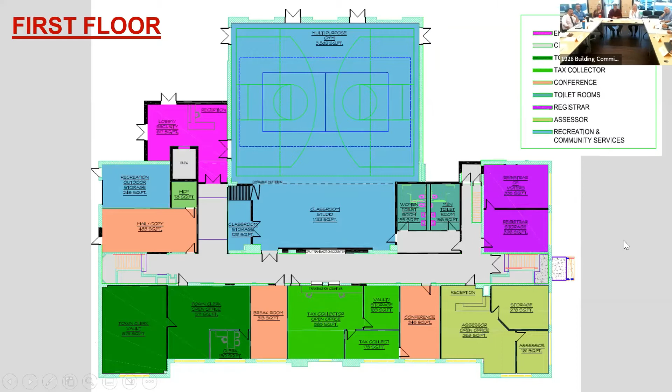I'll walk you through the building as one would experience it. We kept the entry lobby position on the left-hand side in the pink. We added a reception and security counter similar to what exists in Town Hall.

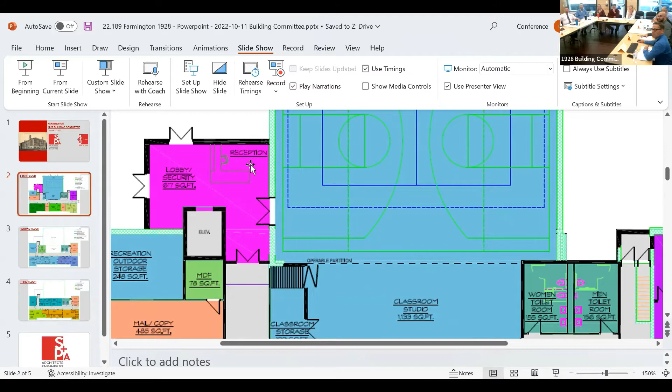You can enter the multi-purpose gymnasium directly from that lobby, or proceed through the doors at the bottom of the lobby down into that main corridor.

On the left-hand side, we've added a shared mail/copy room used by all departments, the main MDF server room for the facility, and a component for recreation outdoor storage, with an overhead door for direct access. The multi-purpose and community rec classroom/studio remain the same as last time.

One concern we discussed with Kathy and Peter, and are assessing in our office, is with use during normal business hours for town hall, but potentially after hours for community and rec - how can we provide the needed levels of security within the facility? That was the rationale for adding that door at the bottom of the reception lobby.

If someone came in after hours, that door would be locked. They would have access into the multi-purpose gym space directly off that reception. Then, if you could go down, we'll show the toilet rooms.

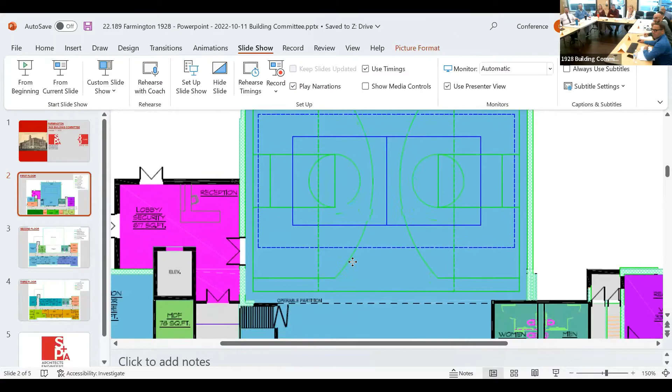Directly off the multi-purpose areas, you'd have access to a sub-corridor for the toilet rooms, with another door at the end of that sub-corridor that could be locked during off hours - so only the multi-purpose toilet room reception area would be accessible then. During normal business hours, those doors would all be unlocked and open.

Moving down to the other programmatic elements within this floor - you could start at the bottom left, maybe.

The departments accessed most frequently by the public are typically the clerk, the tax collector, the assessor, and the registrar. So those are the departments we've included on this main level.

The town clerk has vault storage needs, which we want to place on the slab on grade of the lower level or ground floor, if possible. That slab on grade in the lower left-hand corner would be where we'd place the town clerk vault. They have their open office and the clerk's office.

In the salmon color, these are going to be our shared spaces throughout the building. So we have a break room on this floor.

As you get into the center of the building, on the corridor side at the top, adjacent to the community rec room, are computer terminals for public use. Opposite that would be the transaction window for the tax collector's office - all central to the building, easy to see in and out, well secured.

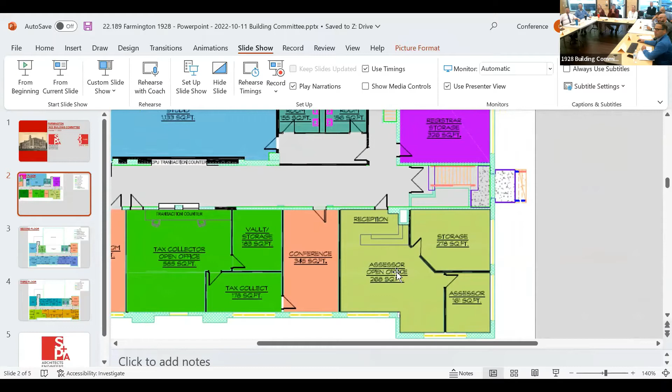On the opposite side of the conference room is the assessor's office, storage room, and reception/open office areas. In purple - and these labels got flip-flopped - this would be the registrar area. You enter into the registrar's office, and behind that would be their storage room, with pretty large storage units for all the voting equipment, ballots, and secure storage.

What we also like about this plan is it provides them access, if needed, to utilize the multi-purpose space for classroom/studio use - whether it's same-day registration, or if there's any plan in the future to have voting in this facility, it would allow for that as well.

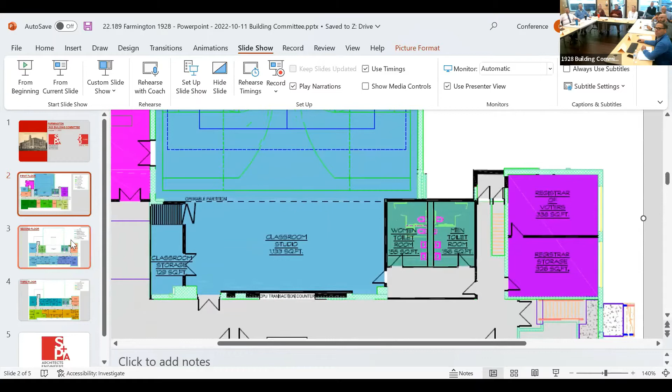Usually zoom out at first, Dave, and then we could zoom in.

On the second level, we've moved community, rec, youth services, and social services up to the second level. That entire bottom block in the two shades of blue is the same layout we looked at previously, just moved from ground floor to second floor. We've provided another classroom space in the upper left-hand corner, adjacent to the elevator, and in green are the IT offices and IT workroom. The toilet rooms remain in their current location, renovated.

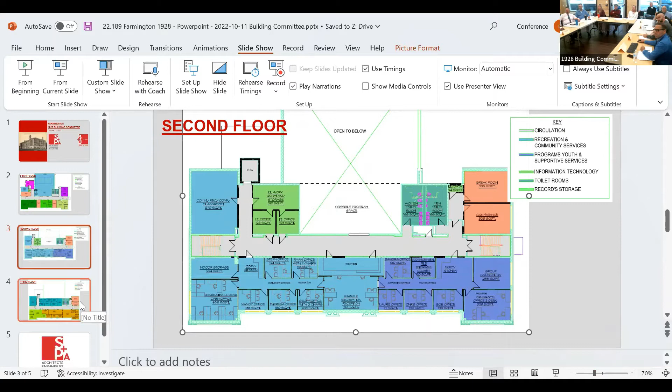As you'll see on all floors, we've provided a shared break room and shared conference room that would be utilized by the different departments. I won't go through the layout since we talked about that two weeks ago, but if you want me to backtrack, that would be fine.

On the third level, the remaining departments are the town manager's office, which is that teal color, the finance office in green, and public works in orange. I'll start with the town manager, which is closest to the elevator.

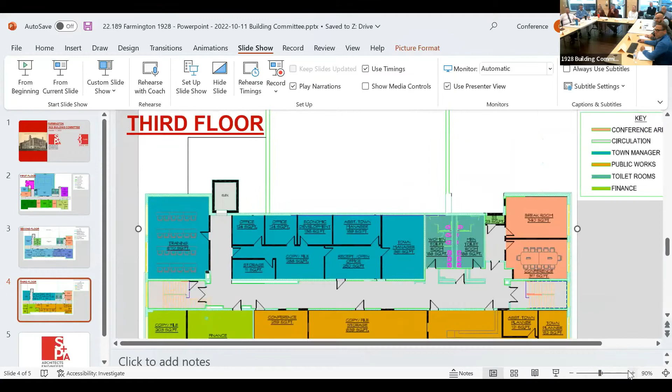On the left-hand side is a training room that is utilized most often probably by the town manager's department, but would be open for other department use as well.

The actual town manager's department is across the corridor, with an open office reception area where that door comes off the main corridor. Then you have the town manager, assistant town manager, economic development, and two additional offices for five total, as well as a dedicated copy file space and dedicated storage room that is about twice the size of the existing storage room, which is a need we heard during our interviews and questionnaires.

All these departments either meet or slightly exceed the square footage they currently have in town hall. There weren't really any large asks when we met with the department heads—usually a little more storage, maybe one more office, more file and copy rooms. So in general it worked out quite well that each department is probably getting 100 to 200 square feet extra versus what they have now, which we see as not excessive, but useful in the growth of the town and in allowing the needs of the town to be met a little better than what currently exists in town hall.

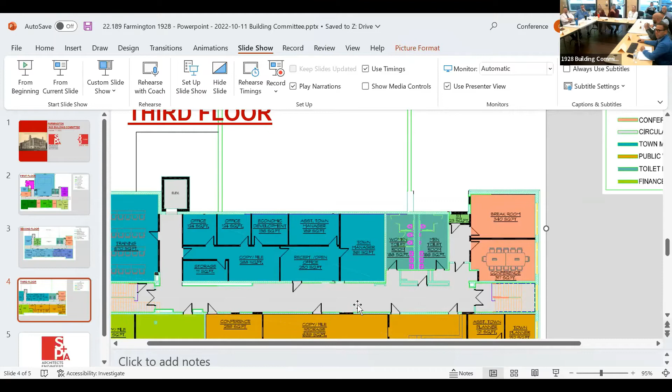On the bottom left is finance, mainly a large open office with cubicles, but again a dedicated storage area, copy file room, and the finance director's office.

Public works has seven independent offices for fire marshal, building official, ZEO (zoning enforcement officer), town planner, assistant town planner, public works director, and chief of engineering services. The area Dave's highlighting now would be the reception counter, as well as open office for engineering staff. The large rectangle to the left of that would be your copy, file, and storage area.

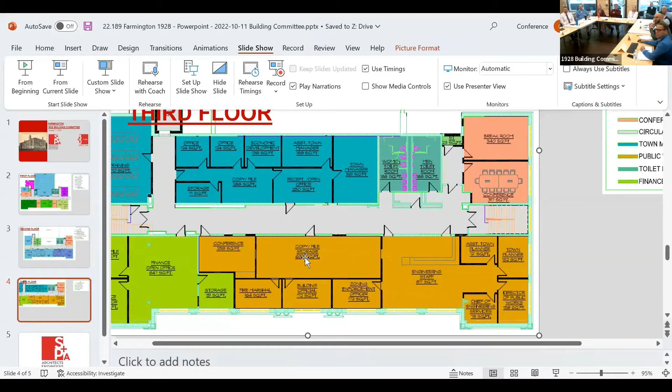To the left of that is a dedicated conference room for that department, since they often have larger conference meetings than some other departments, and there's a conference room within their space now, so we've created that to meet their needs.

No dedicated vault. We could partition off some of that copy file storage to create separate secure storage rooms, but a vault would likely not be approved by the state when making determinations.

They'll only allow true vaults for departments required by the general statute, typically probate, and we can't create a rated, dedicated room. You just have to officially designate it as a vault, but the floors, walls, ceiling—I should say really the walls—are rated as opposed to full.

We know we need to go back and probably switch some of these rooms to make sure the larger offices go to the functions that need more square footage, and also talk about how things are arranged for public access as well as day-to-day staff use.

I want to point out that there is a little bit of flex space. We have a break room and a conference room on each floor, which isn't always typical or required. There could be just a break room on one or two levels. That provides flex space if we need to increase square footage or add program that may have been overlooked in the first pass.

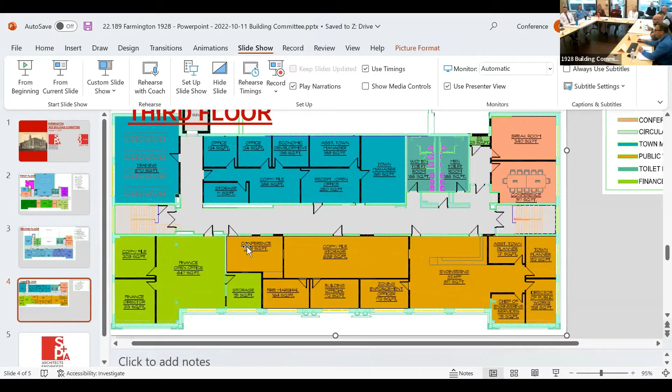The multi-purpose group, which is Jim, is there a space in there for seating? I know we're not talking about furniture and things like that, but I'm curious about seating.

So bleachers, we often see, especially in an elementary school, bleachers that might only be 2 tiers, like small seating areas.

It would take away some of that court space. Right now the boundary lines of the basketball court are pretty close to those exterior walls. So it would be a compromise if we were to do anything fixed, and it would need to be along that exterior wall, most likely the top wall.

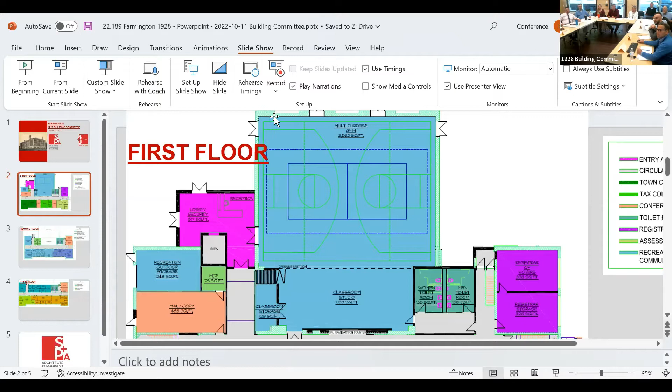Those two doors at the top aren't necessary, we can just have the doors out on either side. So that would be the location where we would consider it, but it would be a slight compromise to the boundary lines of the basketball court.

But there's space to stand. Yeah, you could have loose chairs. You still have that classroom space, right? If that's a partition wall, not a solid wall, then if that classroom wasn't in use, there could be portable small bleachers or portable chairs set up on that side, which would provide plenty of seating.

Correct, without having to go through. Unless someone were to wander intentionally or unintentionally, there would be no reason for anyone using that space to cross into the town department areas.

I would assume that everybody, all the departments, would talk about security in general, since you guys have certainly set up a lot of different ways for security that the town hall didn't have in the past.

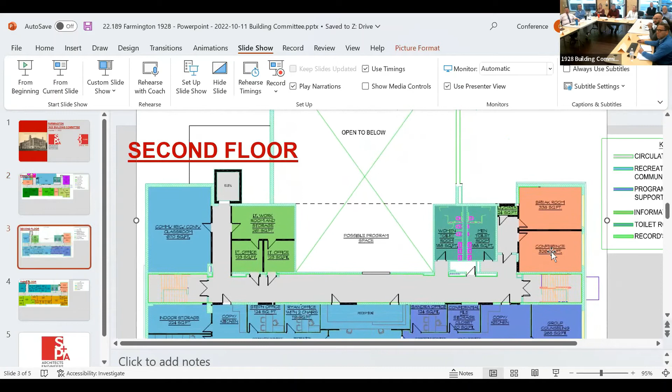Could you just show me the conference rooms? Do you know off the top of your head how many you have in the building for conference space? There's one shared conference room on each floor, for about 10 to 12 people each. There's a room on the 3rd floor for public works, and a training room on the 3rd floor that's a larger conference room, or will function as one, on the left-hand side.

And what does that mean, training room? That would be for when HR does our testing for all our different positions and things of that nature. We use that quite a bit right now—we have to go to the community center or different rooms to do that, so that was the thought. It's also used for training for employees and different things the HR department does. So in total, counting the training room as a conference room, it's 5.

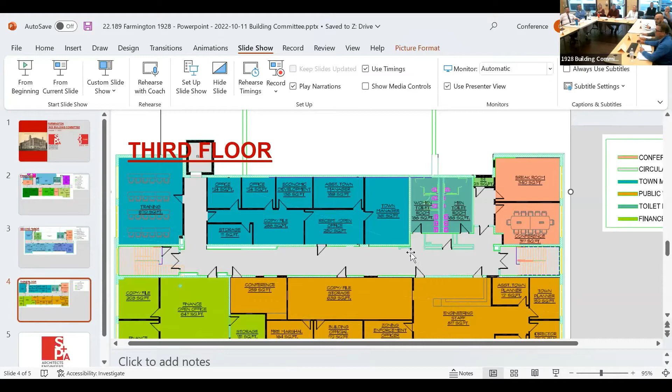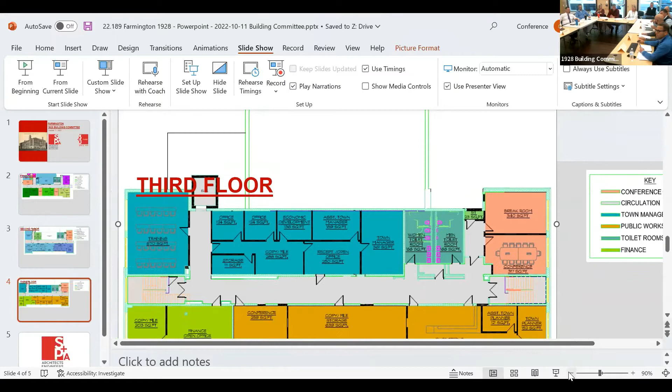One of the things I wanted to talk to the committee about - when we met, Chris showed us this late last week, and it's great that we all could move in. But I think the next thing that really has to happen is that I need to look at it, and my department heads need to look at it to make sure it really works for us.

Off the top of my head, I see things like even what Russ was saying about not having this vault - we haven't gone through it yet. I see a couple of offices that look like there's too much space versus some that look like there's not enough. The conference room, like even the training room, which I think we need something like that, but I'm not sure we need something as big as that. So I think we need some time to really go through it with the departments using the space to make sure what we're designing is what they actually need.

No, and again, one of the things we did talk about, and Chris you put it on floor 1, is that what's going to be essential on the diagram on floor 1 is that we're going to need a reception type of area, which you put in pink on the left-hand side. I think it's going to be used for multi-purpose rooms more in the after hours, but there's a reception there and people are coming through - not through the town hall. If things are happening during the day, it's more like the senior center where people are coming through that area.

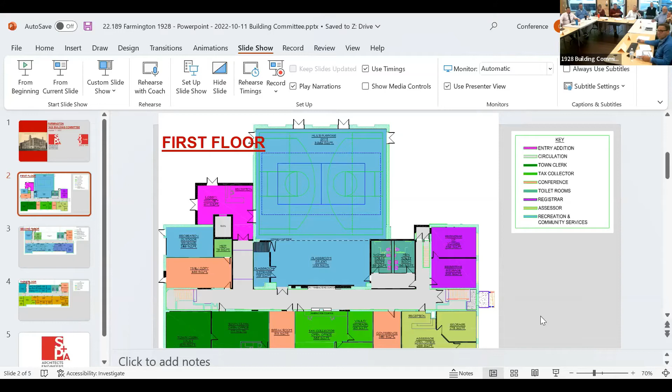Or do something to keep the glass there. We wouldn't be able to keep the glass though. With the layout, trying to keep those corridor walls, I think anywhere we place it in this building is likely going to obstruct at least one section of windows. And actually on that side of the building, on that ground floor level, a lot of the windows were removed and filled in back in the 60s.

I'm just looking from the front window. So if you see on the right hand side, there are two windows that were actually removed from the left hand side. It used to be symmetrical.

That was it. I'm just wondering, and a couple of my questions have been answered already. I like the idea of this. I would just be more concerned about the multi-purpose use during the day and the interaction with the town hall, probably than after hours. After hours, I think you've got pretty much covered. I just wonder about during the day.

Right, and that's one of the things, again, I think we have to really talk with the department about how much activity. I mean, the senior center obviously has activity, but that's the senior center and that still will be going, but how much of the actual rec programs are going on during the day? I don't think that many, but they probably could start earlier, like 3:30, 4 o'clock, and the sound - that was one of the things I said, making sure the sound's not coming into the town hall, we have to deal with that too.

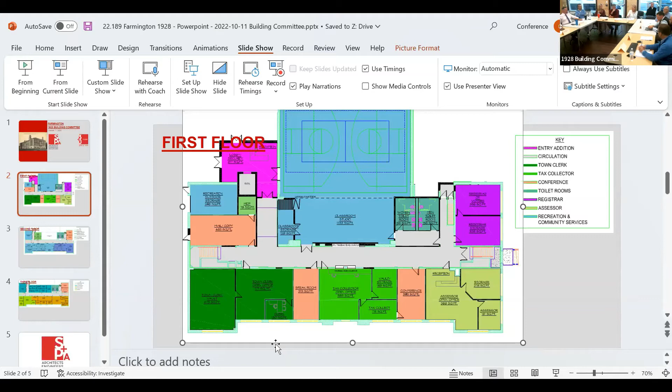So I think worst case scenario, which I don't think would happen, is that if we ever had to have the town hall annex, this would be the annex down here and the other one would go elsewhere. But I think right now we can describe that - I think there is plenty of space in this building for us.

Thank you. Let's go to the third floor.

Those stations, you think we're going to get rid of, right?

Probably two, maybe three. We have 3 secretaries. Depending on how we build. For other, they have 2 inspectors and an AutoCAD person. Survey. So it's possible we could do 4.

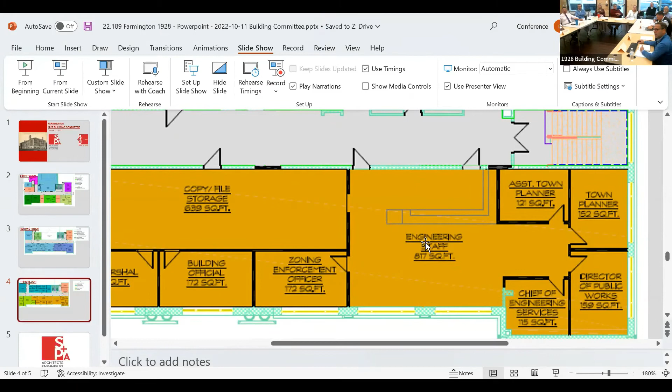If we are able to, with this desk build, we'd put 1 here, potentially 1 here, and if we could rework circulation, possibly 3. In this plan, we tried to give every office a window. But if we were to move the zoning enforcement up to the corridor side or a different office, that would allow us to open up that shared space a little bit more as well.

So I think, Russ, if any department, just due to the size and complexity of public works, needs some massaging, this is probably it. That's one of the things we talked about, and I just mentioned that to Russ - on first glance, I absolutely don't think it's enough space for them. So that's something we're gonna look at, and I think I saw some other departments where we need to move different things around. Just reiterating, this is a first draft, and Russ brings up valid points.

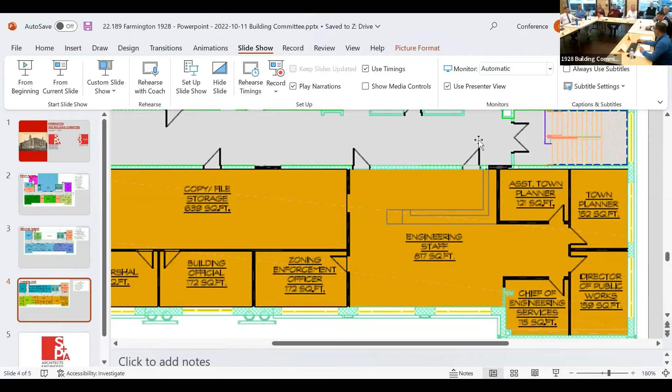So when you guys meet separately with your department heads, you'll zero in very specifically on what your needs would be, and then Chris and Dan can work at that point. It's very possible that the conference room for public works could go where the big conference room is. That also allows more space, or if finance is reduced slightly, that may be another opportunity to allow for more space for public works.

But absolutely, we'll talk more about it, but I do think that right now we're at a crucial stage to continue on that. We need to spend the time, with the architects, with me first looking at it, and then going to the departments and really cleaning it up, so that when it comes back to the committee, it's really pretty much what we think would be finalized, and the committee could ask some of the more detailed questions to make sure we hit all the points.

Okay, so from a timing standpoint, we meet again in 2 weeks - can that be adequate to get a second revision? I don't think so, because when it comes back, it's going to be like we're putting our thumb on it. I think we need to meet with me, and then go to each one of these departments again and look at it and say, is this enough space? Because it's your one and only time, and I want to make sure we haven't forgotten something with some of these departments.

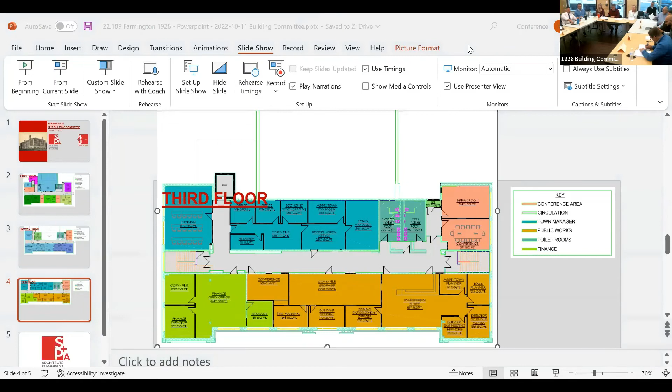Kat did a wonderful job putting it together. We're certainly filling in the blanks here, but I think it's in a good space. The timeline is tied to the town newsletters. It shouldn't overlap, so we're shooting for a week after, so they don't get both at the same time. We had a tentative community meeting planned for November 16th at 6 o'clock, and then a tour of the 1928 building after that, with some students taking town residents around.

Now that we're hearing the timeline and we're not meeting again until November, we might have to adjust that. Is that changing in this meeting, that conversation? I mean, we could try. The thought was if we have something to meet on, we absolutely can. If we have to approve a newsletter or something along those lines, I think we could do it, or do it by computer or something like that.

I'm just saying, when they're coming back with the plan for us to approve, it seems like that wouldn't be until our first November meeting, which is now November 15th. And if we're going to have a meeting on the 16th, I think we should probably push that a little bit to give us some time. Exactly, yeah, tighten it up. We should be ready.

That's an interesting thought, because we were going to meet before the community meeting, but give enough time for you to tighten it up. Yeah, tell me about that. Tell me what you're trying to do. So what do you guys need to do? We just wanted to advertise a community meeting in November, potentially in this newsletter that's going out.